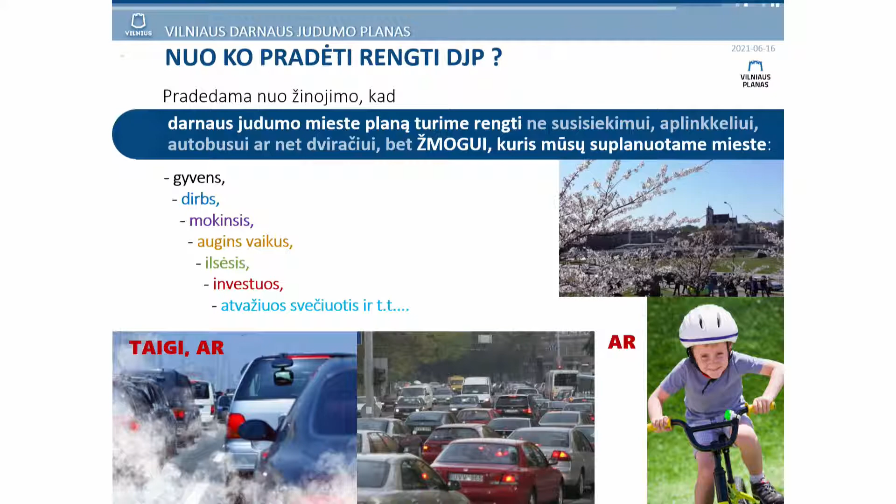So allow me to emphasize that we should refocus and start urban planning from the people — starting from a small courtyard, then scaling up to the blocks, the city: how children are going to play or go to school, how an elderly person, a disabled person, or a tourist is going to feel in this city.

Only by responding to the functions of these individual groups can we expect our urban planning to be a success.

Are there many perfect examples of sustainable mobility? There are many urban planners trying to forecast a future vision for cities. There is a lot of propaganda that cars are evil or bicycles are good — I'm not going to go to such extremes. Both things are equally good.

My colleague travels from Balsiai on a bicycle for 15 kilometers. Another colleague takes an electric car from Balsiai, making better use of energy and saving time. So I would not go into any extremes about what is good or bad. I'd like to emphasize that people should be given the chance to choose what they believe is sustainable.

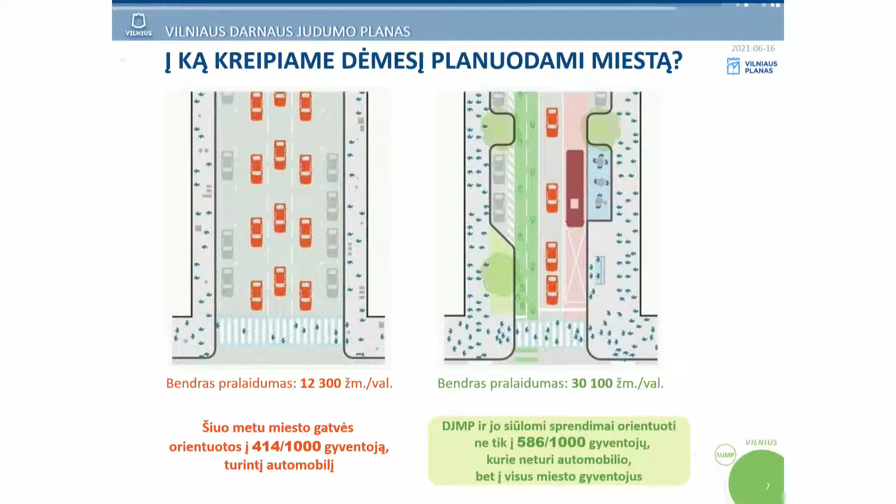So we may come across a number of examples where we can indeed distribute the space on an equal footing for all participants of mobility, and by doing so cut down on car emissions, and perhaps save one or two lives per year, in category D streets, which I don't understand.

How can it be that on streets which pupils are crossing on the routes from school back home, there is busy traffic organized there? This is understandable, but unfathomable for me.

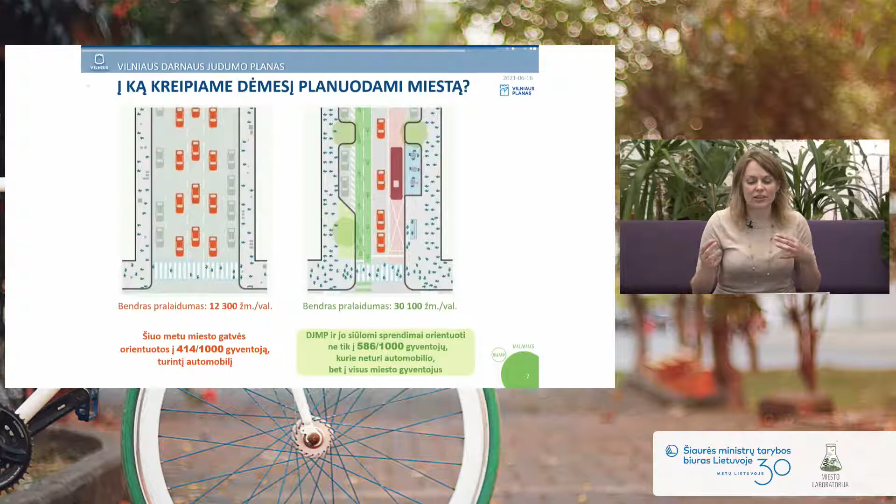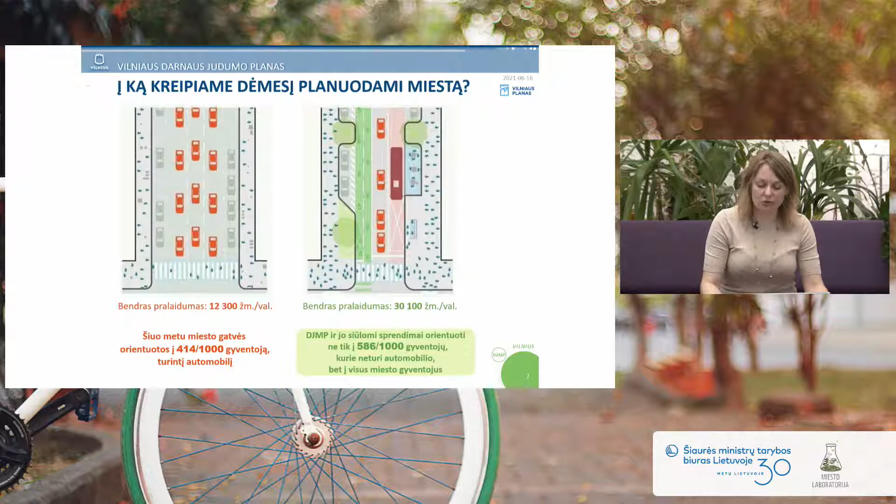So throughput, of course, is the key word, which is a favorite of some urban planners. But proper street planning also increases better throughput, and therefore transportation of people could be organized in a much better way. That's why I wanted to include this illustration, to make my point.

I wanted to say just a few words about the Vilnius mobility plan, because the reason we are meeting today is to cover topics relevant for this community. Nevertheless, I would like to say a few words about this.

I'm going to skip those parts which are somewhat visionary, and which involved many NGOs, people with disabilities, and the senior population. By the way, when we were elaborating on these goals and objectives, it was difficult to fight for every single percentage.

And therefore, I'm so happy after three years when I see on Facebook the sustainable mobility plan, and one association or another is quoting this plan and expecting the city to work according to it. Then I feel that our work has been meaningful.

Professional communities and citizens' communities or special needs communities may not have been involved to the full extent, but at least they have been involved. And this hotspot of all the possible tools dedicated or designated to individual groups of society, hopefully, all boiled down to a comprehensive sustainability plan, including some initiatives for the Antakalnis community.

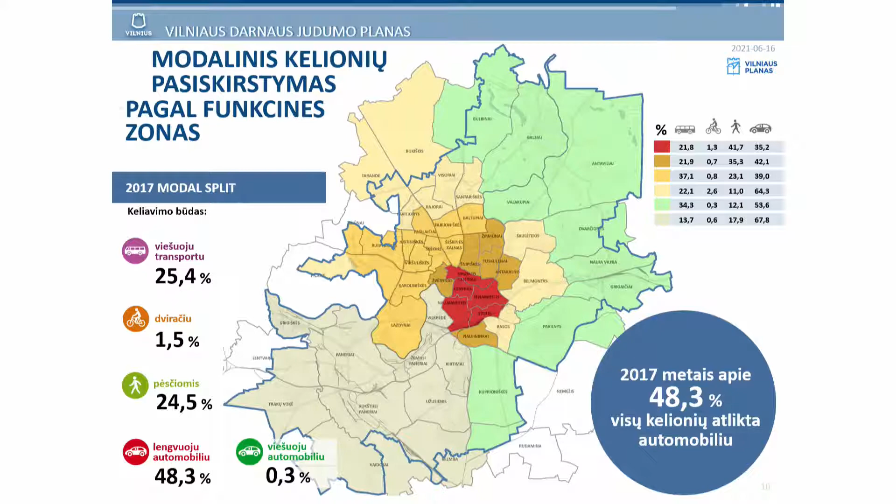Allow me to... so I would like someone to tell me when it is time for me to stop, because I can talk for hours on end. So please feel free to cut me short.

So what is important to know when speaking about the Antakalnis community? What is the current temperature, if I may put it this way? Even though urban planners really want a lot of data, for me the key data is the structure of travel. And if, with all the possibilities we have in Antakalnis, there is still a large proportion of travel by car, one of my ice hockey commentators said there should be something wrong about it.

Something should be done about it. We are missing some things. And therefore, something is wrong with these last-mile solutions if there are so many trips by car.

Antakalnis is, of course, specific in that it may sometimes be regarded as an access district, or somewhere en route to other important destination points. And in this way, this may account for increased traffic.

We were trying to analyze the cars registered in Antakalnis. So the number of vehicles per 1,000 inhabitants is not, by the way, substantially lower than the overall average for the whole of Vilnius.

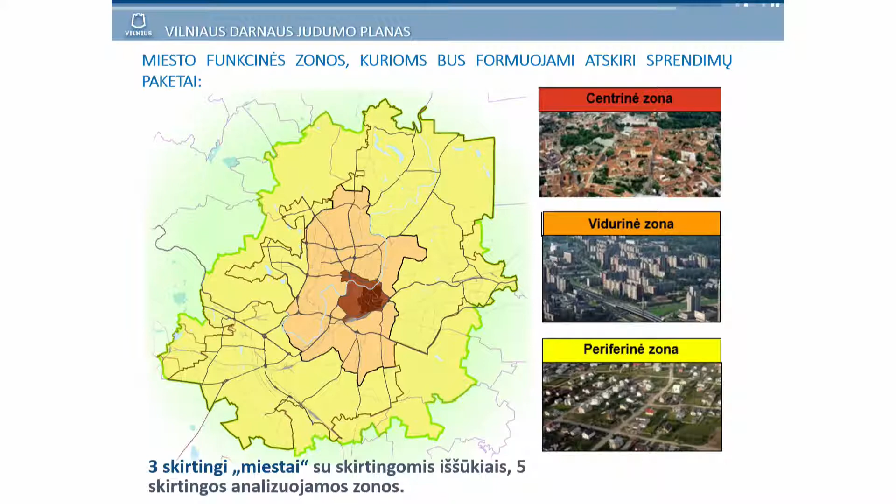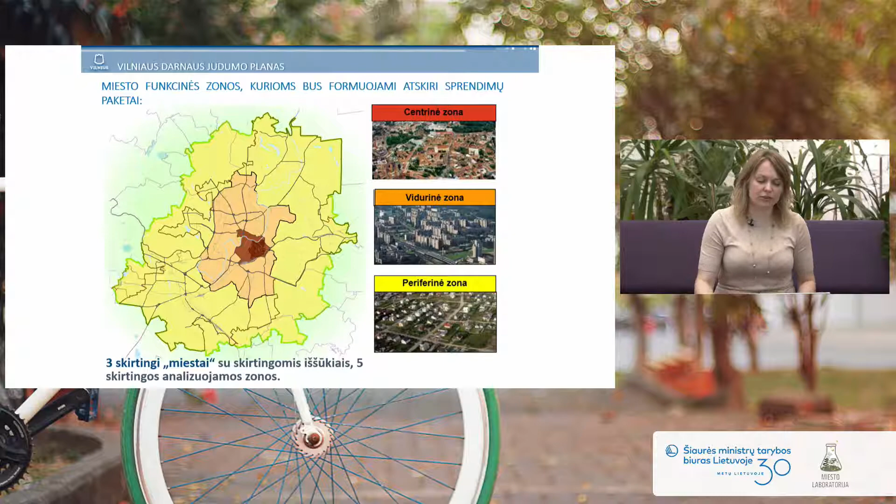Everything happens for a reason, especially regarding Antakalnis. We have to understand it is located in the middle of the city where there is a good distribution of functions, including residential, business, healthcare, and educational facilities, and it is not easy to accommodate them all into one single solution.

We do have to appreciate the context of Antakalnis because it is unique. In this middle zone, the key focus is public transportation, because this is the zone which may not necessarily cover all destinations we want, from where we live to where we need to go. Public transport shall be combined with other modes of transport.

We tried today with Maria, and even though our innovative apps were suggesting other options, we decided to choose walking by foot, and that is the reason why we were slightly late. So sometimes it is a much better choice to travel 1 or 2 stops home.

To finish off with the sustainable mobility plan, we would like to show you the plan that we approved in 2018 at the Vilnius City Municipality. In the previous slide, you saw that almost half of the trips used to be carried out by private cars, 25% were done on foot, and only a small part of trips were covered by bikes.

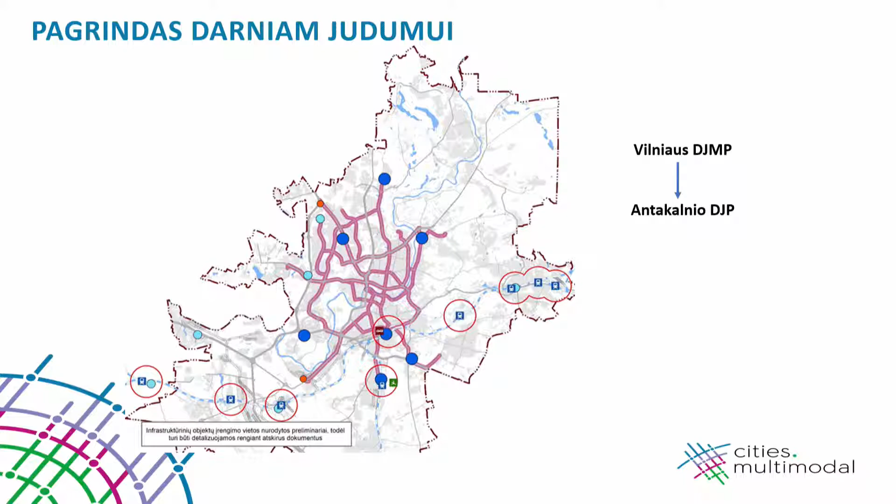Within the scope of this project, we drafted a pilot project and tried to evaluate Antakalnis, considering it from various perspectives of mobility. I will give you Antakalnis as an example to demonstrate the ways to change the mode of traveling, and at the same time this is a good methodological basis for us.

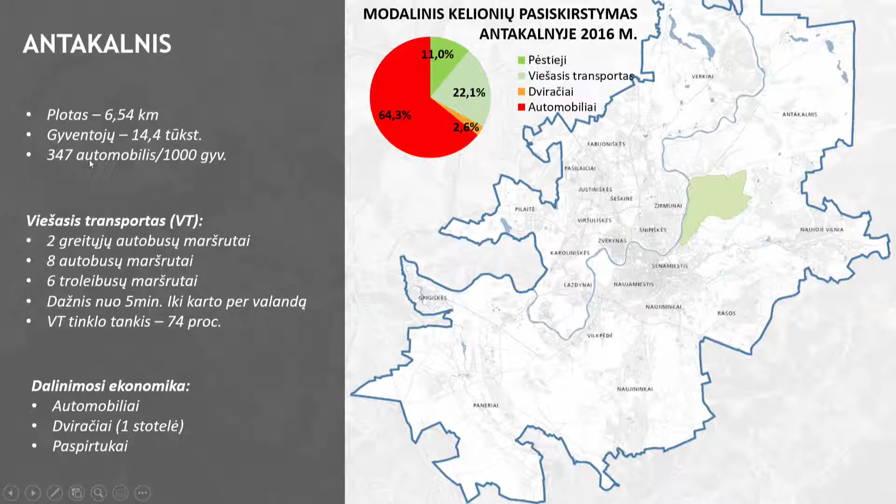Of course, we were inspired by the contents of the Vilnius Sustainable Mobility Plan, and we tried to break this down into details. Antakalnis residents probably know very well the specificities of this district. There are over 14,000 inhabitants and a considerably low number of cars per capita, 347 per 1,000 residents. Public transport is very well developed in Antakalnis district.

When you start analyzing where you can travel from Antakalnis, various other issues arise. For instance, if you need to go to Tuskulėnai Maxima on a number of occasions, there's no direct connection. If you think about the 15-minute trip which requires changing transport mode 3 times, then you raise a question of what mobility is, and you have to make choices.

Of course, public transport functions very well. One of the major objectives of public transport is being reliable and fast. Of course, we do not have dedicated lanes in Antakalnis, that's why it's not fast.

But business knows very well where they can share their sharing tools. Regarding bicycles, the other speakers will speak about that more, but we have the question: why are there so many people traveling by car? Because public transport is not competitive in respect to private cars.

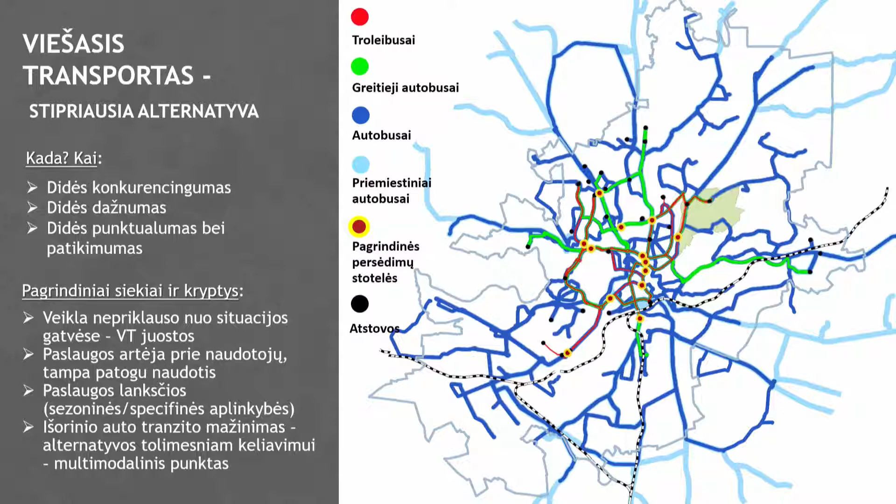Why? Because I live, for instance, on Smėlio Street. But if you live a little bit further, for instance where Maxima is located, and you have a small child, you need to walk to Šilo bus stop quite a long distance, and then change transport modes if you need to reach Tuskulėnai bus stop - these obstacles are illogical.

So from the point of view of the city, what's wrong about that? Because trolley buses travel very frequently and they are not overcrowded. Why do people use them in a limited way? Because they will either take the passenger elsewhere than they need, or it is difficult to reach the bus stop, or there are other issues.

So actually, public transport has to be punctual and reliable. We also need A-lines.

Another issue not really suitable for Antakalnis: we have long routes. Buses traveling once per hour, for instance number 50, and it has a very strange route, many kilometers, changing bus stops.

There are many details which consumers can see only judging from their own perspective. And if we consider it from Vilnius's perspective, we see a large network and huge prospects.

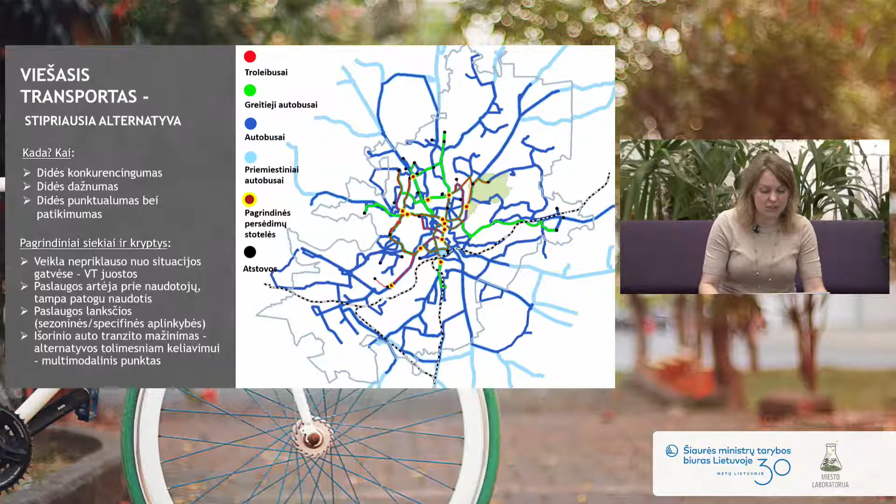And this is a subject our communities could continue speaking about. I am not a magician, and I can't tell the community what to do. But the same can be said about traffic jams and peak hours, but I probably won't speak about that anymore.

Another objective is cycling lanes. Well, there's a number of cycling lanes. Some of them coincide with pedestrian lanes, and somewhere the lanes are not well protected. And I don't actually like riding a bike.

And I was actually smashed into by a bicycle. And actually, one has to feel safe.

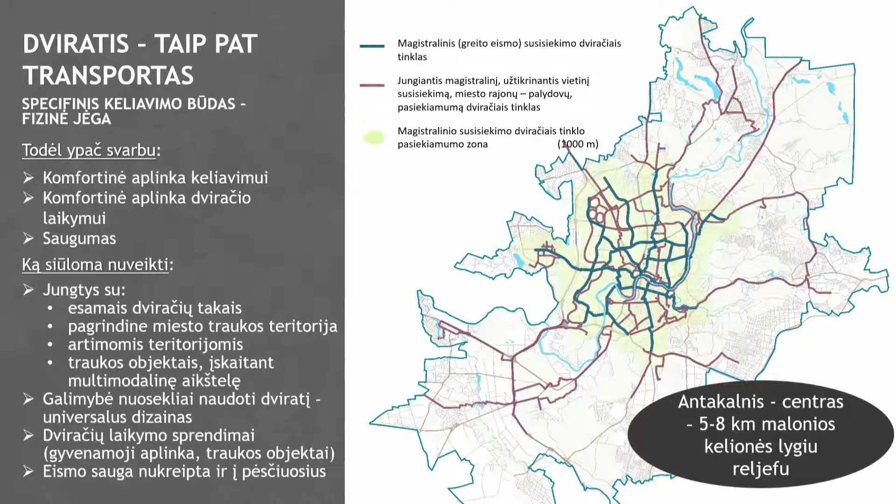And safety means not only the distance that you will be traveling till you reach the cycling lane, but also security - safety of my bicycle where I leave it, because my bike has been stolen 3 times.

And when I worked at the municipality, I used to look out of the window to see whether it is still there, because I was afraid not of the bicycle being stolen, but the child seat being stolen, because I will need to bring my child back from the kindergarten.

Then we have another question: where will I keep my bicycle at home? For instance, maybe I do not take the lift to the 8th floor, and how shall I carry the bicycle up to the 8th floor?

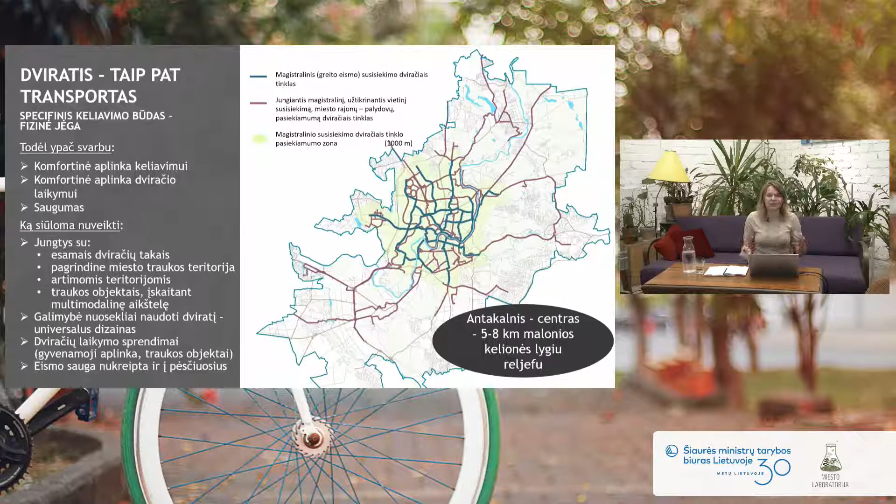There are various issues to be discussed in a narrow circle which the city cannot have thought about. And these issues are considered from the perspective of the city in one way, and from the perspective of an inhabitant in another way. We have to adapt it for everyone - mothers, the elders, the extreme feeling lovers, and so on.

A few years ago, for a number of years, I was working with VGTU secondary school children, and one of the subjects was namely sustainable mobility. The children had offered such solutions which used to make me cry.

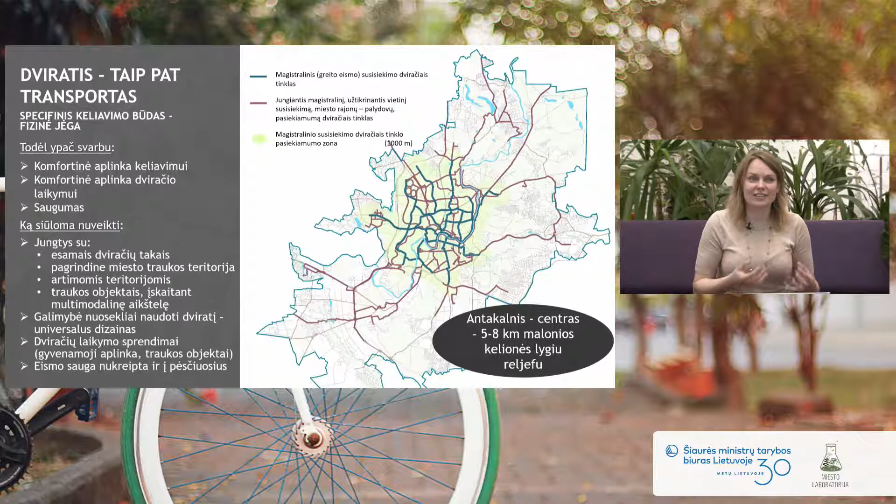The children would say, well, all you have to do is cut out the bushes here, because when I travel, when I ride my bike, I cannot see anything because of these bushes. That's why it's so important to communicate with the community.

Now, traffic safety is also very important. And you could remind us what we wanted to show by this slide. I think I have touched upon a few aspects.

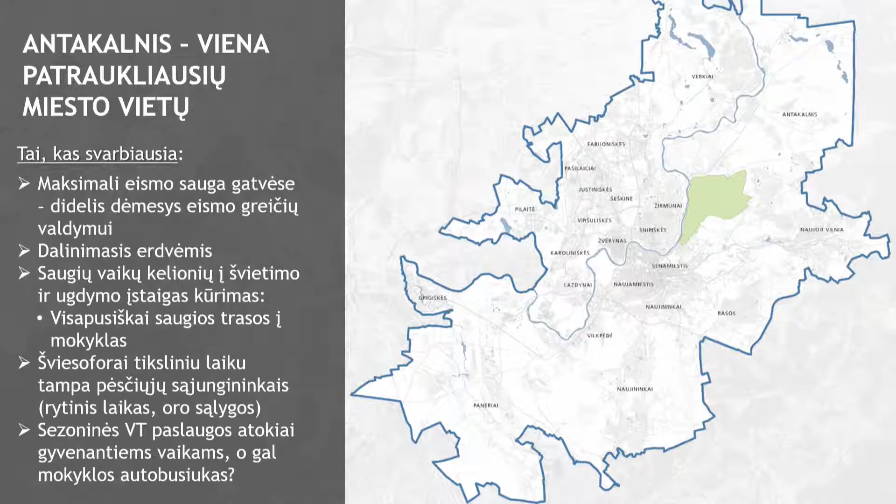Regarding traffic safety, well, they have to see the black spots, and for the passengers, safety means more. For instance, whether I will not be attacked, or my child will not be attacked, or I will not be robbed, or so on. Well, these are very important issues on the part of the passenger

or pedestrian. And regarding cars, I know that

all people choose a car for certain situations. And if I live in Didžioji Riešė, I will not take the bus to IKEA, because there's no such bus, and I don't really have 2 hours for my trip, and I'm going to buy a wardrobe. So actually, cars will exist in cities.

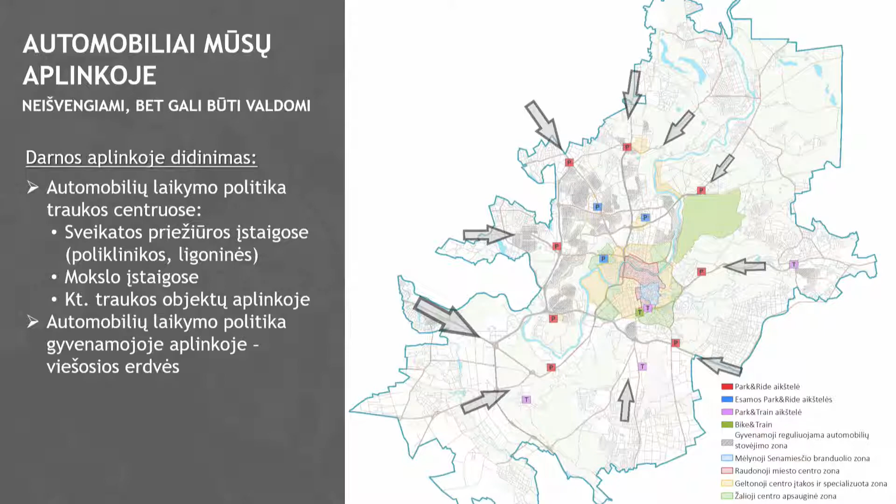So what does the city do regarding car policy and their parking? Because in Antakalnis we have many attraction objects - the hospital, the college, the VGTU secondary school and so on - there are many attraction objects, and we have been tolerating cars for so many years.

And I was showing Maria the apartment block where I used to live for 16 years. So actually everyone is very tolerant towards cars, because there's parking available. Parking fees are very low, if any, and this situation should be solved, and I will soon make a proposal on what to do.

Now, sharing economy. Well, this is a question that has been answered regarding sharing. Well, business raised this question and business has solved it. And to what extent are we going to employ the sharing system for our trips?

It's another question. There has not been a day in my life where I wouldn't advise a young person who would park their scooter in the middle of the sidewalk to think about a blind person. And well, these issues have their advantages and disadvantages.

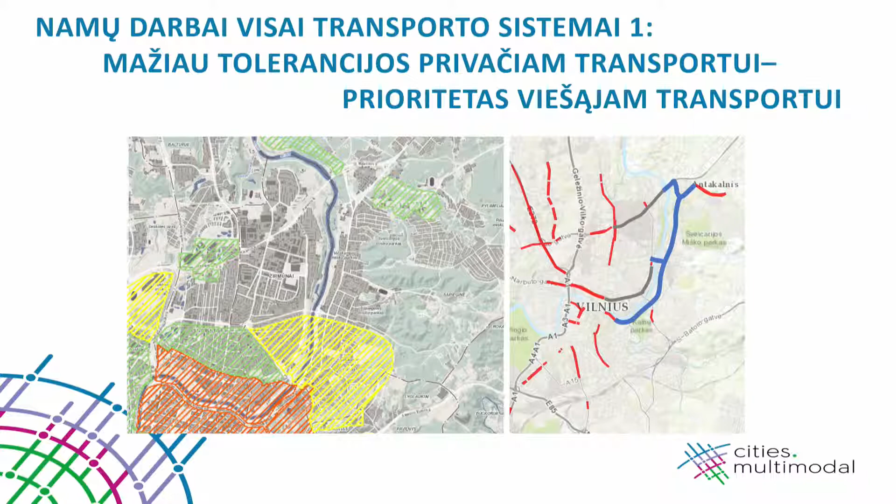Looking at Vilnius sustainable mobility plan, and trying to see how we can adapt it to Antakalnis district and to the inpatient clinics in Antakalnis, by amalgamating all these individual elements into one single structure, we have elaborated a list of proposals for the Antakalnis community. How can we change the mode of transport during travel? We believe it was a rather unprofessional way of dealing with the problem before we analyze how Antakalnis district could be rearranged to improve mobility options altogether.

And just as I remember myself, for so many years we have been talking about lanes, that in order to reach Antakalnis you should travel via Žirmūnai, another district, and only then can we expect people to swap their cars into public transport when it is really accessible and convenient.

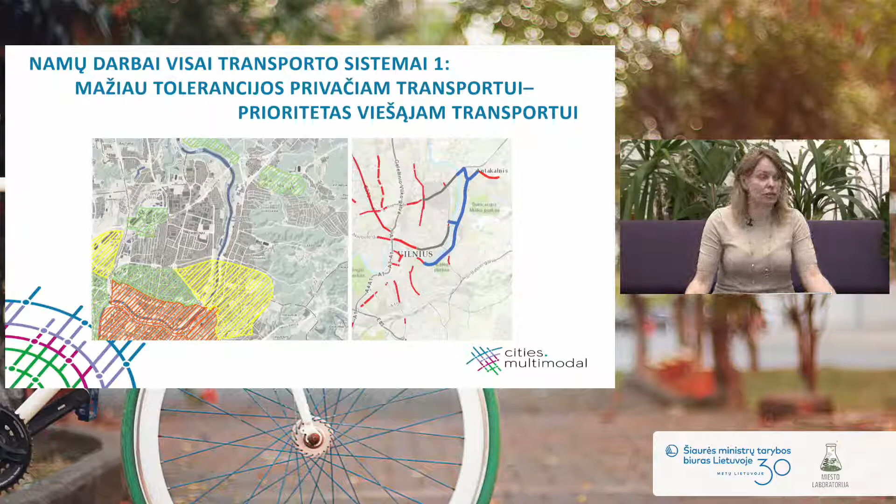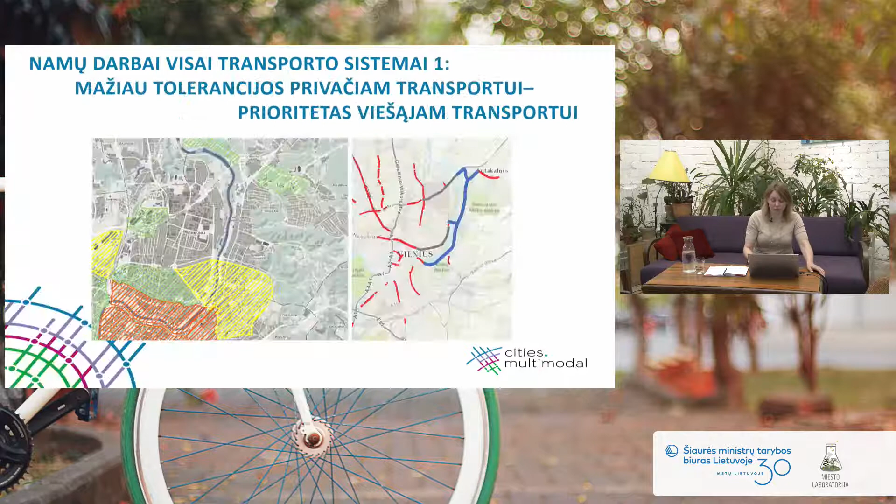Well, luckily, my kid has enrolled into Čiurlionis art school, and most probably by driving my kid there every day or twice per day, I'm going to drop my car somewhere in your courtyards, and there may be other parents desperately looking for any parking lot. So parking spaces and relevant prices or parking fees should also be taken into account.

We also have to analyze what the missing links are between different bicycle lanes. Some material in these slides is somewhat different. This network of bicycle lanes should be seen as a network, just as it is in a pipeline - all the pipes should connect with each other, and the same holds true about bicycle lanes.

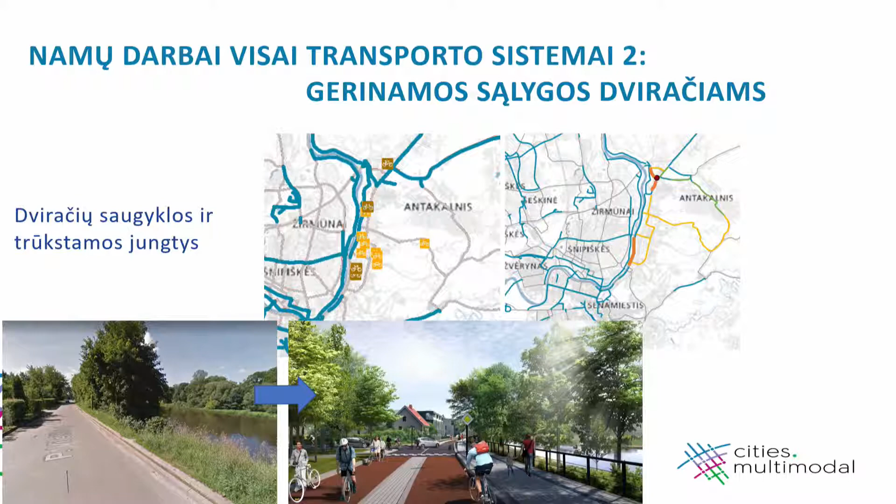So we have to build bicycle storage sheds, which should be located distributed conveniently at a certain frequency next to important destination points - schools, kindergartens, shops, etc. So storage capacity for the bicycles has to be analyzed and dealt with.

And we could also find other options of sharing and how we can change the travel structure. I am also rather controversial when it comes to a bicycle sharing system, because we cannot suggest it if there is only one single stop next to St. Peter's and Paul's church. We may not suggest this person dump the bicycle somewhere next to the church and then take a trolley bus.

So we always have to analyze the demand first before suggesting or supplying anything. Sometimes there is indeed a mismatch between these two sides. So if we want to build some bicycle sheds, there should also be a bus stop much closer to this bicycle storage facility.

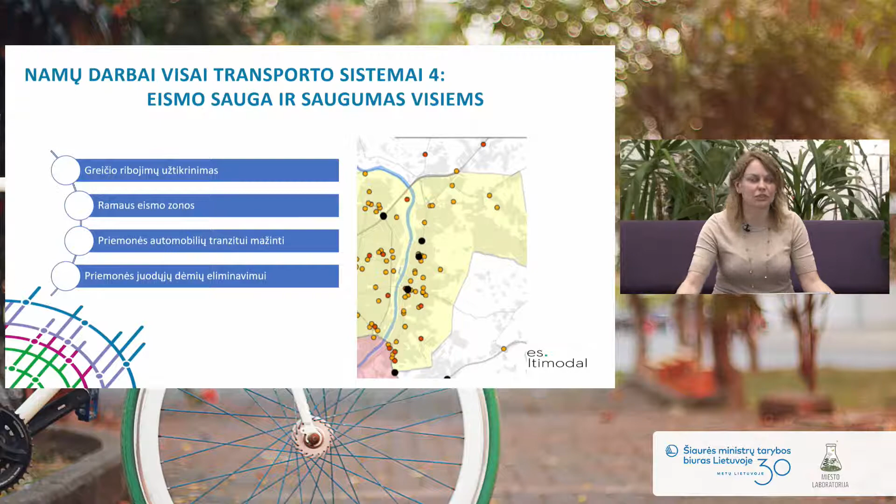There are a number of types of solutions which are not that investment intensive, and they could improve safety - speed limits, certain measures to reduce transit. I'm going to quote one daughter of the professor who says she was very proud of traveling at a speed of 90 kilometers per hour because she wanted to take her kid to school. There shouldn't be a possibility of developing such a speed within the city - it is too dangerous.

So there are many measures like additional traffic lights which have to be put in place, as well as a number of other measures, the ones that my colleagues were suggesting.

I remember a couple of years ago I read a book, I believe it was called The Risk, and it was about traffic safety and a number of examples of how Swedes all of a sudden decided to travel on a different side, or decided to wear helmets on a bicycle. And I remember from that book about the so-called black spots - they simply cannot be eliminated, they can only be relocated. Unfortunately, this is a sad truth.

So whenever you deal with one problem in one area, be it the mentality of the people, some morphological structure of the town, the behavior of drivers, or willingness to change something, usually all these attempts sometimes only relocate the black spots. Well, I haven't been stopped, so I've been talking on end.

So my presentation is an introduction to the fifth presentation, which I expect to hear today, to be made by community members. I do expect that you have picked up some ideas from my presentation so that we can elaborate in a discussion later. So what are those conclusions that we may make?

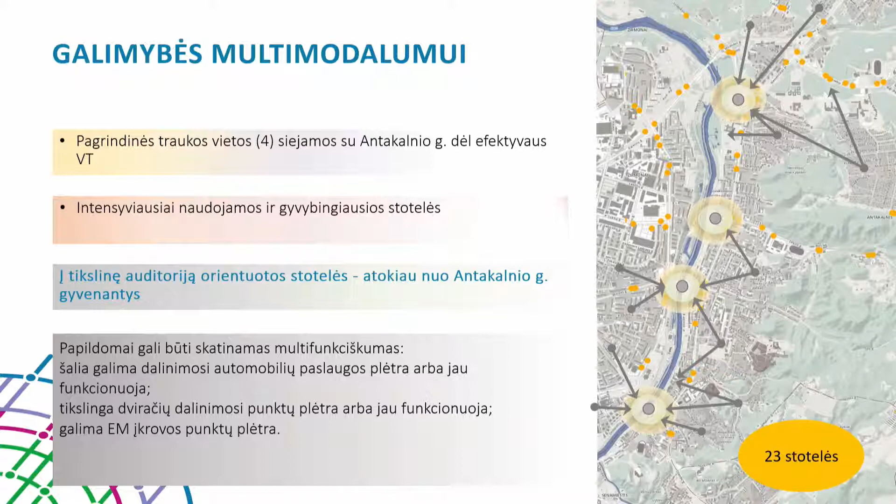Antakalnis, to me, is a perfect place to live and to work and to travel, both within Antakalnis and into and en route from or to Antakalnis. And you are also a living proof of the attractiveness of Antakalnis, because many of you have come on a bicycle. Perhaps sometimes it is easy to take a scooter for the last mile. Or just as one kid mentioned to me, sometimes you need to clear out the hedges to improve visibility for the kids traveling from school.

There are a number of possible measures which are interrelated, related to solutions at a local level, and they can only be thought out locally. Then there's a possibility of swapping or taking a car to travel, which would be a more natural choice. I remember when I first picked up this topic, all of a sudden I had a car myself, but it was a service car with free fuel. So every Friday I decided to choose a different mode of travel. I remember at that time there were mini passenger buses that had to stop somewhere on the road, and you had to have cash.

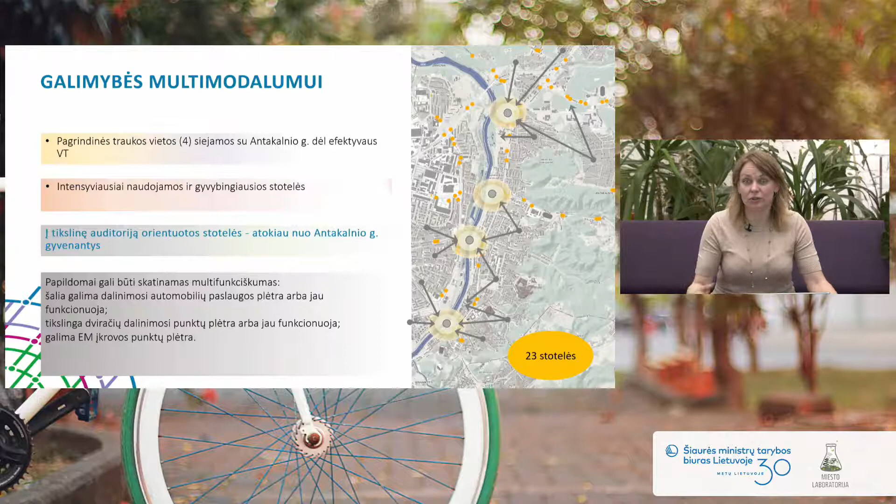There were a number of difficulties which have been easily dealt with within 15 years. I think it takes very small steps to make a huge difference, so that sustainable mobility is not understood as something extremist, or as a daredevil traveling at devil speed regardless of everybody around him or her.

Sustainable mobility has to ensure four elements: good reachability of bus stops, good reachability of all destination points, be it on foot or by bicycle, and universal design. Unfortunately, taken individually we may find some solutions, but not all cities can easily tackle all four. Public transport has to be arranged in a way that makes it a user-friendly experience for a person with a disability.

People need to have the experience of traveling in a wheelchair and taking a public transport bus on the route. A friendly design is very much required for a lot of solutions, and we have traveled a lot with people with various disabilities, disability of moving or visual disability, analyzing the available routes and how friendly they are for people with certain disabilities.

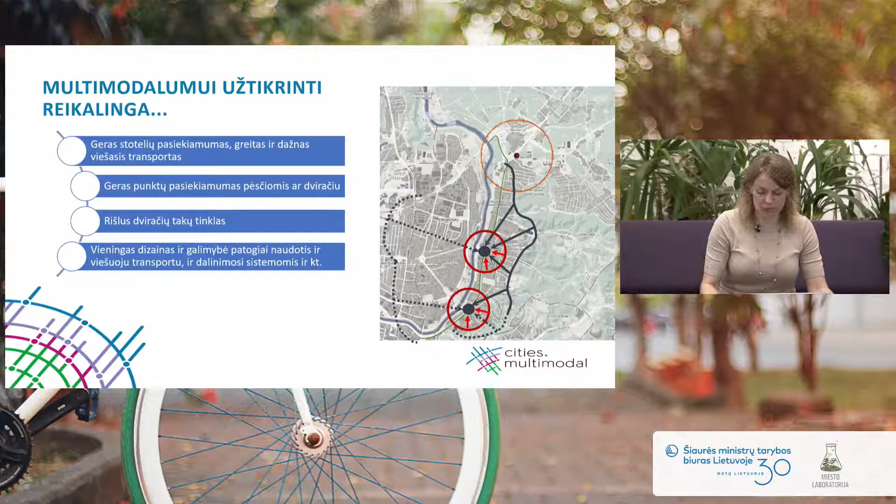Every single newly constructed ramp for wheelchair users is too high or too steep. So how come that even new constructions are not user-friendly? A person in a wheelchair may not travel freely. I went on an excursion with a person with visual impairment, who had very direct vision without peripheral vision, and indeed we had lots of difficulties on our way to our destination.

There is still so much room for improvement when it comes to sustainability in people's mobility in Vilnius. We were looking for possible options, and we have a pilot project - the pictures are from this pilot project. I wanted to illustrate the logic that led us to accept these pilots, and whether this project is going to be a success or not, expensive or cheap. I do expect that we're going to learn some lessons and draw conclusions.

Where shall we multiply the multimodal stops? If they prove to be not successful, we will analyze further what the root causes are. I remember one Swede asking, so where shall I start from with sustainable mobility? Well, just do something about it and try by doing - learning from your own mistakes or from the mistakes of others, but don't sit complacently and don't do anything.

I remember some politicians from Kishinev and Tbilisi who are no longer asking for the Western type of experiences or expensive solutions. They have become really clever - they want to learn from our mistakes. They are asking what lessons we have learned from all the expensive projects that we ran in our cities. These people are really smart.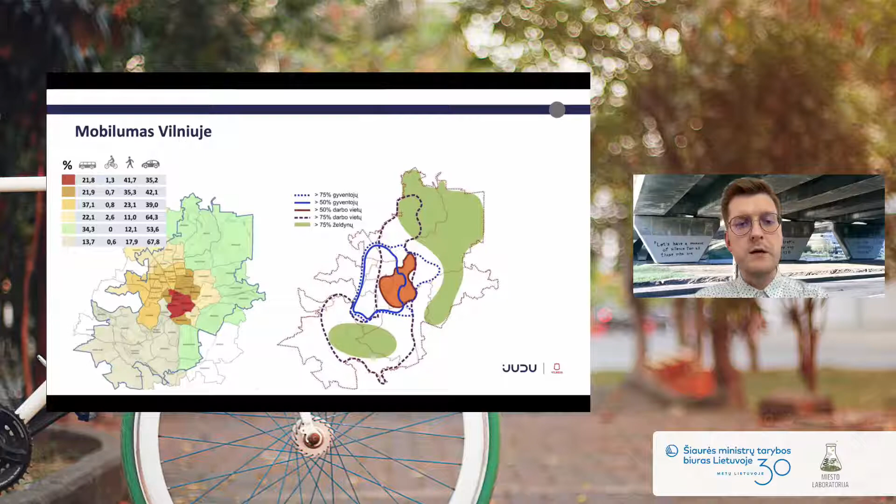So we shall not expand the city at the expense of the streets. In terms of mobility, even though the city is growing, we still have a lot of residents living in the suburbs, on the outskirts, who need to reach destination points within the city. They choose buses, private cars or other modes of transport. Roughly 50% of residents live at a somewhat close distance. Unfortunately, the city is being developed up to its outskirts, which is practically uncontrollable expansion of urban space, and the city has no power to regulate this beyond the currently existing borders. The infrastructure needed for small or short-sized flat houses, rather than high rises, is even more investment intensive.

Now let us compare the year 2017 versus 2030. Sustainable mobility is an attempt to balance the options. Roughly 30% of all travels in 9 years' time should account for public transport, 7-8% by bicycles, about 4% by taxi, car sharing or other options, 30% by passenger cars, and 29% any travel taken on foot.

We wanted to run this study last year, but due to the pandemic, the structure of non-traveling changed a lot. We couldn't invest enough money into the study, which may have led to a completely different set of findings, given that people changed their mobility habits during the pandemic. So we decided to postpone this study until we are back to normal.

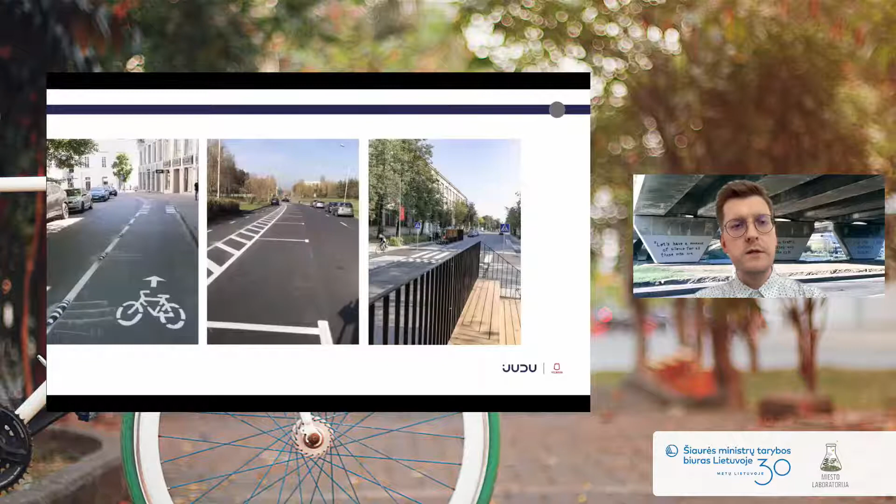So we're trying to balance and find space for various modes of transport. Three photographs taken from different spots of the town show how these places have changed once we introduced a larger variety of possible traveling options, including bicycles and others. Starting with Rūdininkai Street, where the bicycle lanes were basically made at the expense of streets that used to be used by cars in the past.

Šimulionys Street was also narrowed down, and now we have additional parking spaces. And Naugarduko Street, which used to be quite a broad street, was made narrower in order to accommodate cyclists. There are also some little courtyards which again give additional possibilities.

The street diet is made up of various ingredients, and we're trying to apply this diet in various proportions. We can imagine how a well-balanced breakfast should look like, including protein, a bit of carbohydrates, a bit of fiber. It doesn't necessarily mean that we shall be using only this healthy diet; sometimes we may detour once in a while and find other possible alternatives.

Allow me to talk about these other alternatives. What is the city doing with its currently available options? With all the financial possibilities and capacities that we have at the moment, we are trying to put the pedestrian in focus, a person who is traveling on foot. Every year we renovate a larger proportion of pedestrian lanes compared to previous years. This year we renovated 30 kilometers. Is it a high figure or a low figure?

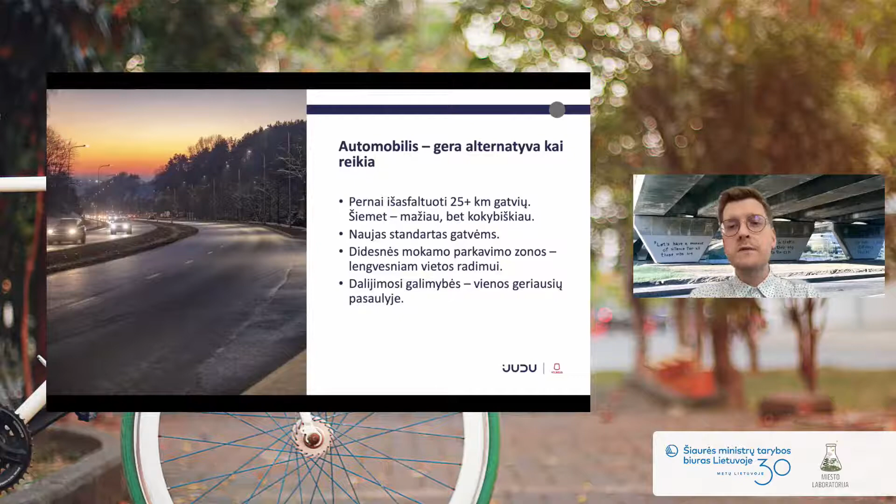Last year, there was a larger number of parking zones, which makes it easier to find a parking spot. What else do we see? A safer street for a safer neighborhood. Of course, we would like to see narrower streets in residential areas so that they are safer and less noisy, especially streets close to residential homes. On top of the noise, we also get road accidents in residential areas, which could easily be avoided.

These accidents are the result of human error. In residential areas, there should be narrower streets and much stricter speed limits, so that we really feel safe.

Any inconveniences for drivers? Well, without pushing so much on the accelerator, you can still travel conveniently. Narrower streets and lower speeds don't translate into longer journeys. Slower speed means easier regrouping on the road, seeing each other, less hard braking, and therefore much less fatal consequences when you reduce your speed.

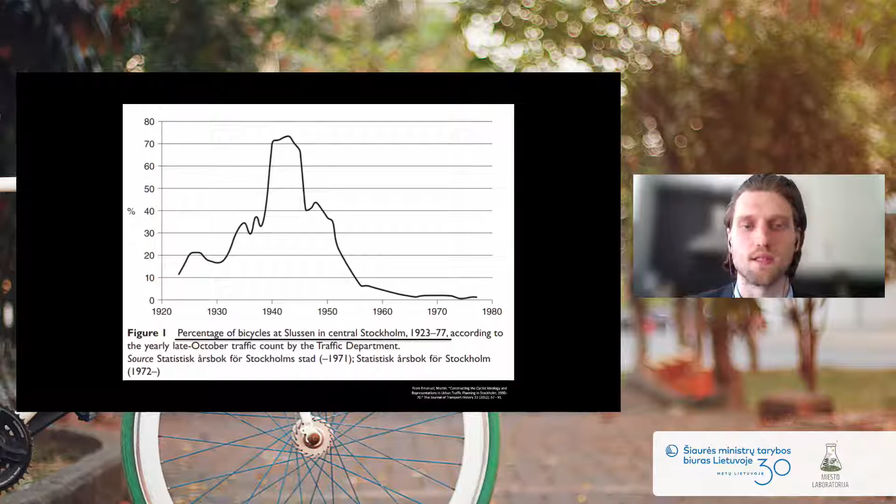This graph shows a place in Stockholm and the percentage of bicycles traveling through that place. What had been the very logical foundation of our cities, namely that when you want to cross the street, you go directly from A to B, that has been the foundation of how to move in cities for 10,000 years. That was replaced by an altogether different logic, where you always have to take a detour when you want to cross a street or go somewhere in the city.

And we know that this had very big impacts on us, on our health, and on our environment. The children today are no longer as physically active as they used to be. And some research suggests that the people who grow up today will be the first generation in modern time to have a shorter mean lifespan than their parents. So a lot of people will live shorter lives because of poor health.

Cycling can be very effective in increasing health. Only by riding 15 minutes to work and 15 minutes home, 5 days a week, an adult who is not physically active can reduce the risk of several welfare diseases by up to half.

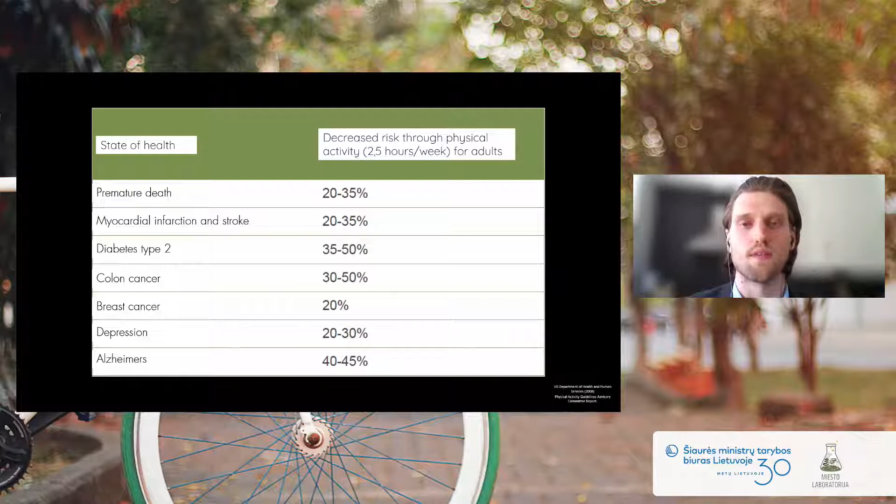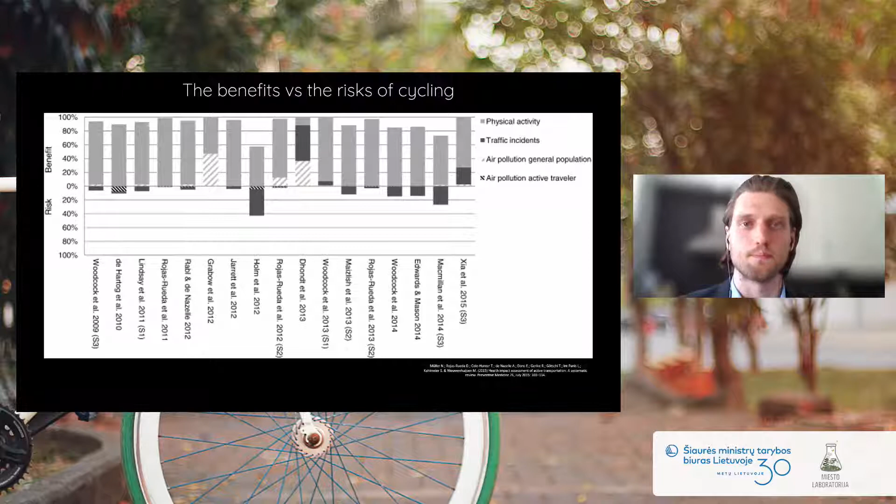My second question to you is, do your policies encourage cycling in relation to other modes of transport? I think that's a key question if you want to increase cycling. Is it more attractive or less attractive than, say, the car?

Increasingly, families in Sweden don't feel the need to buy a car. They can get by with a bicycle and public transport. We can go on vacation together, and we can go shopping, grocery shopping.

But the problem is that the environment created in the 1900s is not always good for those of us who want to ride a bicycle. This is sort of the disclaimer, don't try this at home, because in Sweden there are a lot of good things happening, but also a lot of bad things. We have become experts in putting up posts in the cycling paths, and we've become so good at this. This is really a problem that needs careful attention at the national level in Sweden.